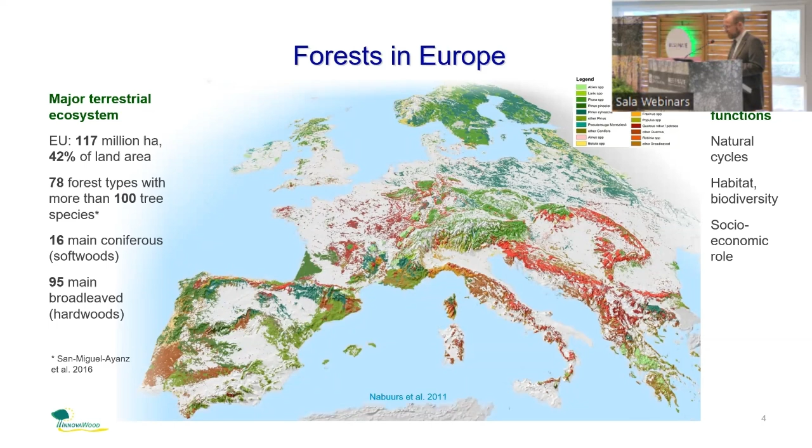These forests are very important for ecosystem functions: the natural cycles, the habitat, the biodiversity, and as we've heard already in many speeches today, also the socioeconomic role. They are the backbone of the so-called forest-based industries, including wood industries, paper industries, furniture, all sorts of uses of timber as a material. And then we can also include non-wood forest products.

But this European forest ecosystem, as a whole, is really affected by climate change, and this will have a major impact. In forestry, we think in long time spans. There will be a shift in the forest tree species matrix, because the increase in temperature and precipitation from climate change will favor different types of local climates, meaning the composition of the forest will change in the long run.

This is already a very well-known graphic from Hanewinkel, showing the shift. If we think in a perspective of forest management up to 100 years, oaks will increase, whereas spruce and pines will decrease. So the cultivation area within Europe will shift more toward broadleaf species. Another very important factor is the increase of disturbances such as droughts, fires, storms, and pests, leading to more risk and uncertainty in forest management, which we have to consider.

As one main recommendation from the Resonate project, which is co-organizing this event today, this means we have to go more into resilient management to mitigate these impacts of climate change. You have to proactively manage the forest and not just leave it alone. You have to adapt and restore forest types — there's a term, 'pre-storation,' a combination of adaptation and restoration. The third recommendation is that you have to develop these forest and forestry value chains more, making value out of wood as part of the objective to improve resilience.

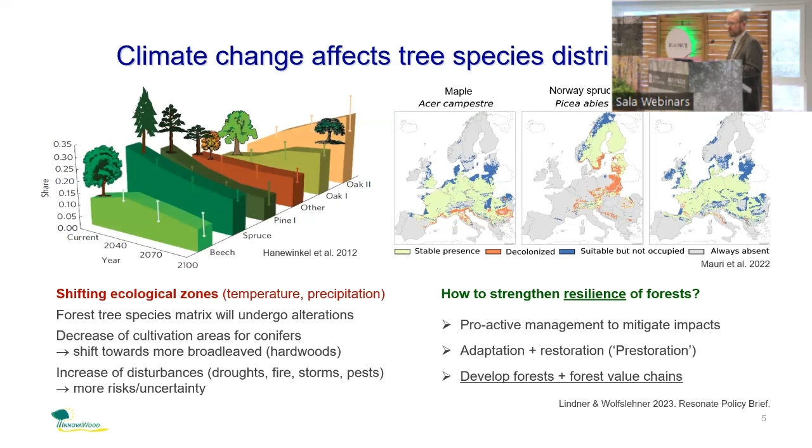But the market reality today is that hardwoods really represent only a very small share so far.

Only 8% of the total solid wood production in Europe is hardwood material, and this goes mainly into the construction sector. 64% are sawnwood and engineered wood products, and another major share goes into wood-based panel products, so furniture.

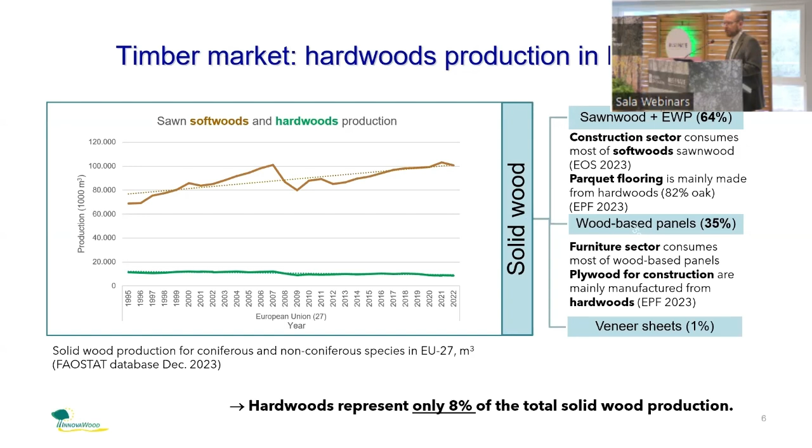The reason is hardwoods and softwoods are not the same raw material in structure. Another important aspect is that the potential to extract value from a tree is much higher in softwoods than in hardwoods. Basically, you can use 80% of a spruce tree, whereas in an oak tree it's only 50% of the trunk and raw material, because the tree has much larger crowns and more branches, so there's just less potential for value extraction.

That's why this hardwood sector is not an economic driving force in the wood sector. If you think about developing the hardwoods field further, you have to consider there's an ecological reason why hardwoods and softwoods are so different. They are very different types of materials, with very different mechanical properties.

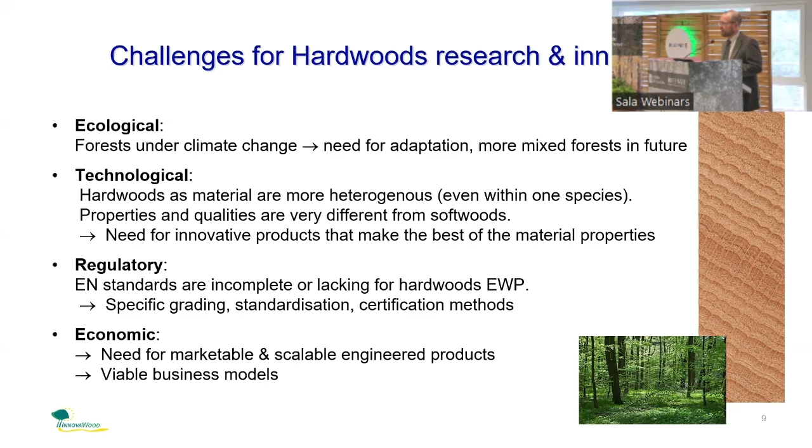That's the first question: where are there really opportunities, or roadmaps where we could go? And then companies have to develop viable business models. So this is the challenge we are all facing, I would say, as a research and innovation community in Europe regarding this hardwoods matter.

So I will show that several companies and people are already working on this. I will pick a few selected examples of hardwood products which are innovating the wood construction field. This is, I think, quite a well-known product already, the BauBuche.

It's a hardwood laminated veneer lumber from Pollmeier in Germany, using the qualities of beech to create a super strong building material, which in a way is similar to or can compete with concrete, but also attains even smaller cross sections than softwoods. So it's outperforming softwood CLT in certain circumstances.

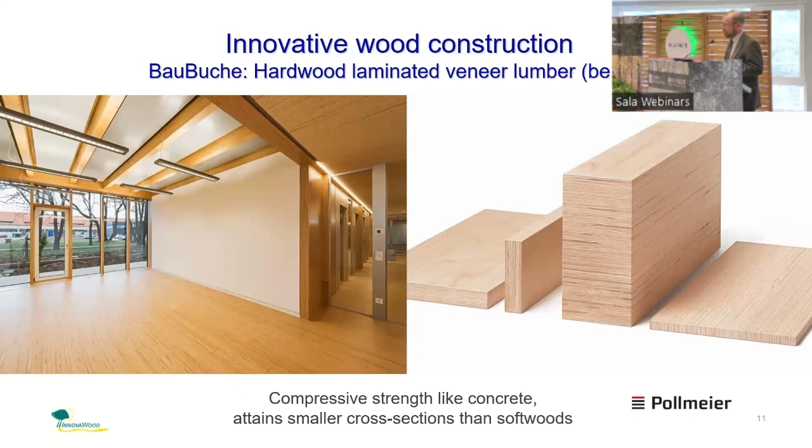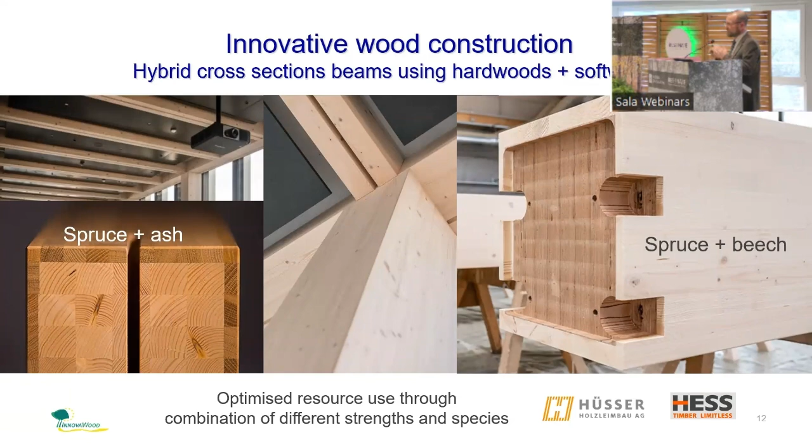Another one is that we can actually combine hardwoods and softwoods. These are two examples of companies working on a hybrid cross-section of beams using hardwoods and softwoods together. This optimizes the resource use, so you need, in a way, less material, and you can combine these different strengths of the different species. So this is one interesting way to go.

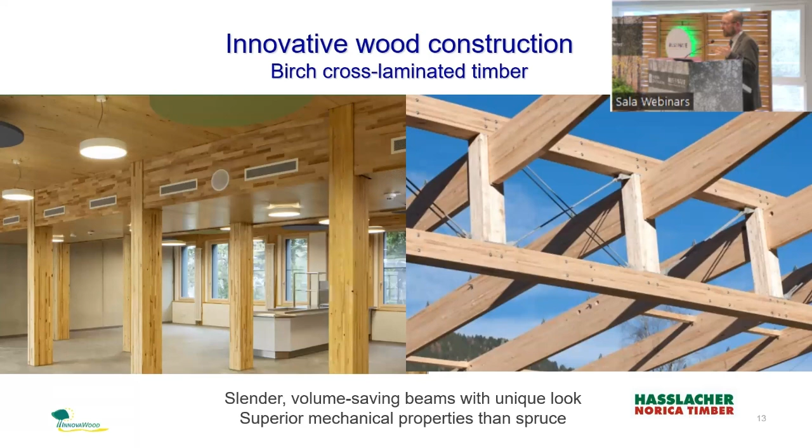As mentioned before, birch is becoming an interesting tree species for the construction sector. Hasslacher is already producing cross-laminated timber as a standardized product, allowing very slender and volume-saving beams with a very unique look. It doesn't look like spruce CLT, and they claim superior mechanical properties compared to spruce, because you can make much longer and more slender beams. So there's an advantage of properties compared to softwoods.

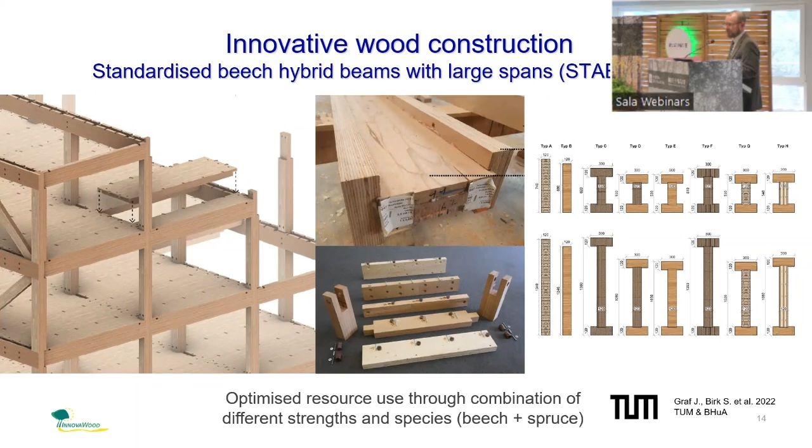Then an example from TU Munich, a German research project, where they look not just at the timber material or engineered wood material, but also at a construction system - how to make use of the difficult properties of beech to create more standardized beam projects useful for larger spans. They worked a lot on different types of combinations and lengths and combinations of different strengths within the components, to create a building system that can be used technologically in the building sector.

Another area goes more into research and innovation, where people are looking into more complex construction systems that mimic organic structures. We all know the tree is the most optimal structure to use resources in a biomass way. It grows naturally because it saves energy and material, and to mimic this in construction processes can be very interesting.

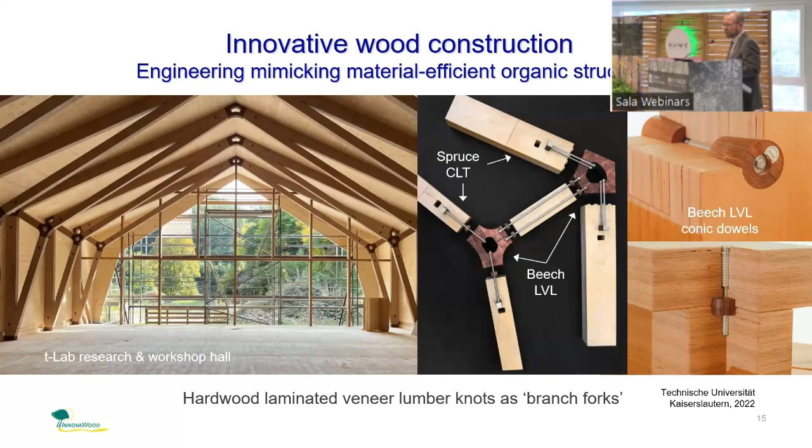This is a project from the University of Kaiserslautern. They use spruce CLT, but connect it with hardwood laminated veneer lumber to create very strong knots which mimic, in a way, a branch of a tree. They also have different ways of connecting it with beech conic dowels - a very interesting direction to use engineering to copy advantages of timber.

And then a last one, which is a more inspiring, quite disruptive approach - something called whole tree architecture. There's a whole area of companies and research centers trying to use this. The idea is not to destroy the timber, the tree, but to use the forces and the shape of the tree as it is, and then use scanners and advanced algorithms and CNC robots to assemble these naturally grown components. This is an example from, I think, London.

It's a design office in London. They created a whole barn where the main beam structure in the middle is created out of different hardwood logs, if you want. But this is not just fantasy - there are actually companies also in the US creating large barns and large structures with this kind of tree, just using the tree as it has grown.

Okay, so more ideas just to inspire you where research in this field could go. And then I'd like to give a bit of an overview of European initiatives.

On the European level, there's this notion of carbon sinks - cities should become carbon sinks. We are all dealing with the climate crisis globally, and it already impacts us on many levels - you just open the news every day, there's a new crisis induced also by climate impacts. That's, I think, one reason why timber has become more evident and visible in recent years, because it can offer part of the solution for climate change mitigation. The question is, can we really talk of a timber revolution, or is it more of an evolution where step by step the wood sector becomes more important? But definitely there is a strong advantage of the wood sector to contribute to the decarbonization of the built environment.

This only can work if we connect forestry with long life wood products and also with the construction sector, the built environment. So we need sustainably managed and resilient forests, and we also have to take into account adaptation to climate change and ensure biodiversity - this has to be a holistic approach to forestry. But the timber used from this land use can go into long life wood products, and we can innovate and improve a lot there. Another aspect is that these long life wood products should become circular - the idea is that we don't just produce a product which is used and then destroyed again, but that it can actually be disassembled, so buildings using these products can be taken apart and constructed again in a different building.

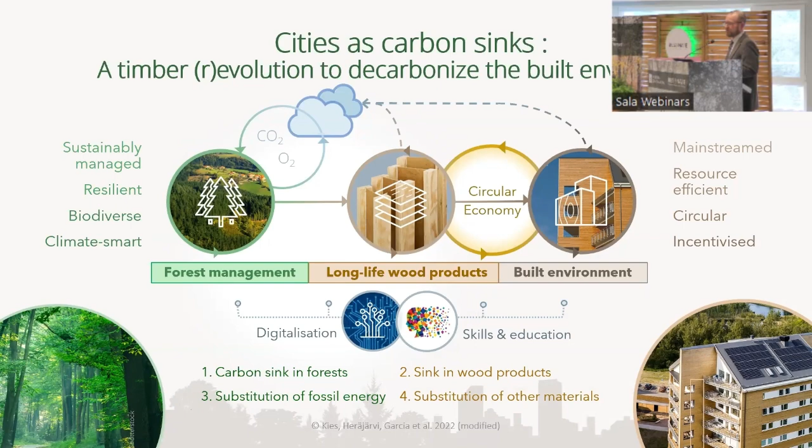So this circular economy will have a very big impact on the long-term carbon sink function. This can only have an impact if these kinds of products become more mainstream, if they can be upscaled, if they can use the material in a much more resource-efficient manner. They have to become circular, and I think the public sector especially has to be a pioneer to incentivize this.

So this is the narrative which is becoming much more visible in Europe. One interesting new approach is this New European Bauhaus, which was launched by the President of the European Commission in 2022. It's the first time a President of a Commission starts talking about wood, and everybody was really surprised to hear that.

We all know that today, building with timber could save up to 40% of carbon emissions compared to concrete. By keeping the carbon inside the wood, one day timber could turn our homes and even entire cities into carbon sinks. This is a very strong message if it comes from the President of the Commission - one of the best ambassadors for us.

The reason is because she was advised in recent years by people from the wood sector and from climate research, notably Professor John Schellnhuber, Director Emeritus of the Potsdam Institute. His slogan has become, in recent years, reforesting the planet and retimbering the cities. Timber construction can become a true silver bullet to fight climate change. So I'm saying this should also be our main narrative.

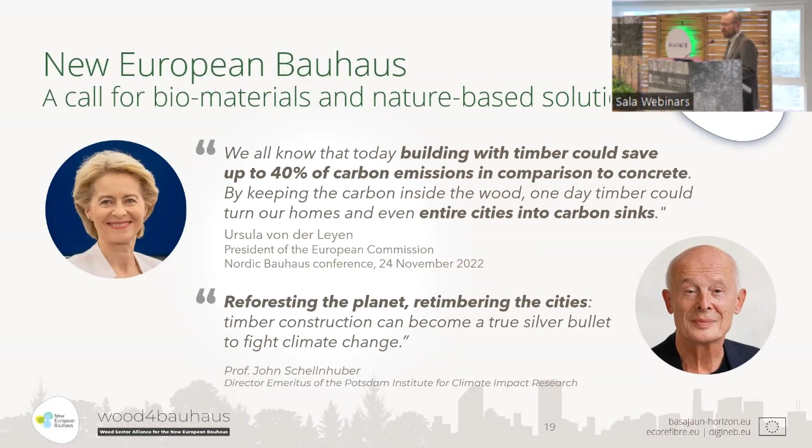If people are listening to us in Europe, we should talk about climate change. We should talk about this possibility that this is a solution to problems the whole society is facing.

So this New European Bauhaus initiative is actually a project of the Commission - a grassroots co-creation movement for the European Green Deal. I won't go into details, but it has triggered a lot of interest, new initiatives, and prize competitions around Europe, and now European projects are funded that are labeled with the New European Bauhaus.

And we from Innovawood are part of one alliance created because of this New European Bauhaus. We call it the Wood for Bauhaus Alliance, which involves all the major umbrella organizations in the woodworking sector - the European Panel Federation, the European Confederation of Woodworking Industries, the European Organization of the Sawmill Industry, and also the European Federation of Building and Woodworkers, representing the trade federations, trade unions, and the woodworkers.

With this alliance, we are quite active, engaging with this Bauhaus movement. We are following what is going on there, writing policy recommendations. And one new outcome is that we have now created a New European Bauhaus Academy Alliance, which will be a platform for skills and training in wood construction.

The idea is to inform other sectors - the construction sector, architects, public planners, the financial sector - about the benefits of bio-based materials. It's a bit larger than wood, but wood has a very prominent role. So how can wood construction become a solution for rural development, urban planning, and urban development? This is the focus of this European platform, which will be launched very soon.

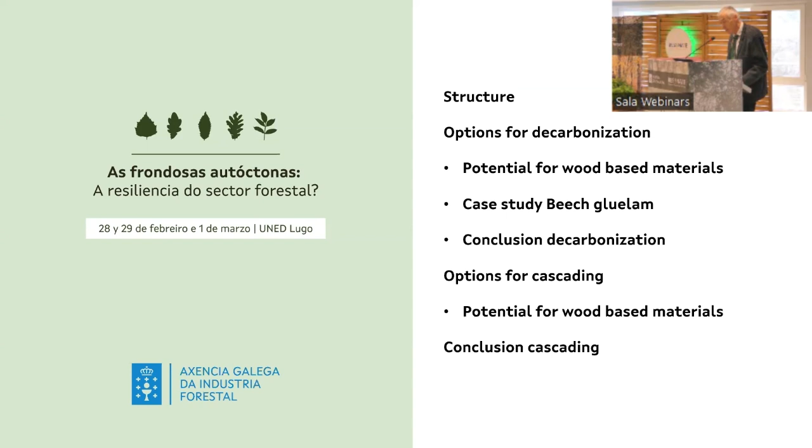And of course, we all know that climate change is reality. We have focused on the big impacts. The catastrophic development has shown even on our ecosystems, especially in Germany, very dry and catastrophic disaster events in Central European forestry in recent years, mainly based on the structure of the forest, but also impacting regional resilience.

And of course, the required conditions are that we have to ban the effects or the causes of the big increase in global temperature, which is clearly related to the use of fossil sources. We have to ban fossil carbon sources by 2050. The next big step is extension and creation of managed carbon sinks. Here, of course, forestry comes into play, and of course also carbon farming.

This could also be related to the wood industry and the protection of natural carbon sinks. Forest needs to be conserved and regarded as important carbon sink ecosystems, along with wetlands and coastal ecosystems. So these are the three main required conditions for decarbonization, and I would say for defossilization, because decarbonization is maybe the main word used.

I think it's a little bit misused, because we will also need carbon from our ecosystems to build future technologies. So to totally ban carbon in our future technologies is maybe not the right way. So I would give priority to the word defossilization.

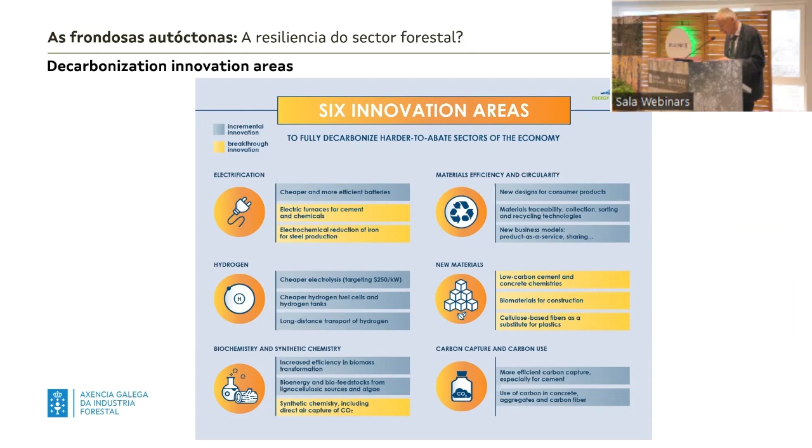So the six areas for innovation where decarbonization or defossilization can take place are shown here. I will not go into the details because I will directly jump to the next slide where we can see technology plays a very important role.

Technology needs to be focused and adapted, and the only hope I have as a technologist is that on one hand, technology can try to give possible solutions. On the other hand, we as the ones using technology also need to adapt. The society needs to be informed that we will not be able to continue as we have done it in the last 100, 200 years. Our future generation needs to be adapted to what is happening now.

This is maybe a fault we have done. We have overused our planet's resources, and now we have to try to adapt our mechanisms to allow at least a decent life for the future generation.

So technology is important. Process developments are closely linked to technology, and of course enablers. This is the human capital, human resources which we are building, and at the end it needs also to be paid and needs to be realistic from the economic point of view.

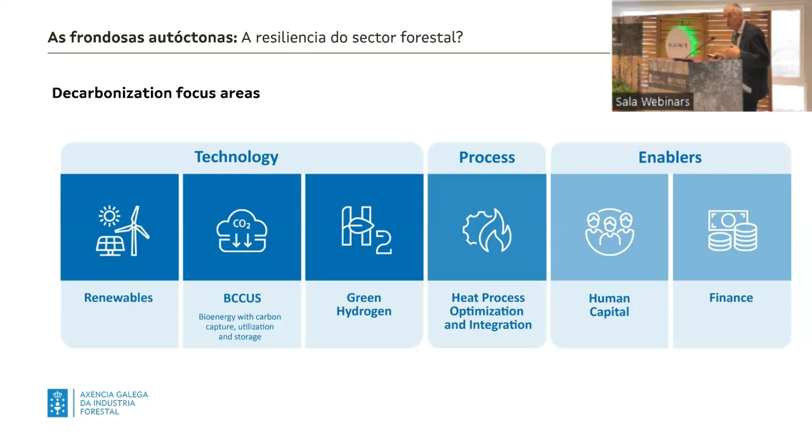I think this is one of the big hurdles we will also face, that industry, and our future followers, will need to pay for what we are now trying to change. This is in the beginning also caused with higher expenses, and this is some of the big challenges we also have to discuss.

Buildings are causing more than already 40% of global change effects. This is clearly shown in different studies from the United Nations Environmental Programme. More than 37% of carbon dioxide emissions are caused by buildings and construction.

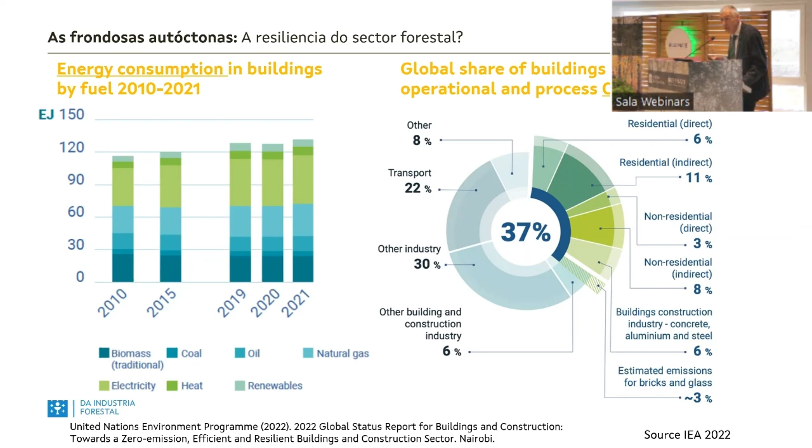That means with the building material, and wood is also a building material, a main building material, we have something in our hands where we at least try to address those big numbers. And here is also my link to the keyword defossilization, decarbonization, and of course it was also shown how this can happen.

On the other hand, we have to think that building construction, the building materials used to build the sites, houses and infrastructure, is less important in the moment because we have improved, and other materials have also improved their technology. It's the building operation which causes much higher percentages in this 37% of global carbon dioxide effects.

I think wood materials, and here also biotechnology and technology, can play a role, because wood is a material which is strong and is also a good insulator. Building operation means the losses of energy, how we operate our buildings—cooling and heating comes into play. Compared to concrete, steel and plastics, wood is an interesting bio-based material which can play a role in mitigating and reducing building operation costs when we use it with good spirit and caution.

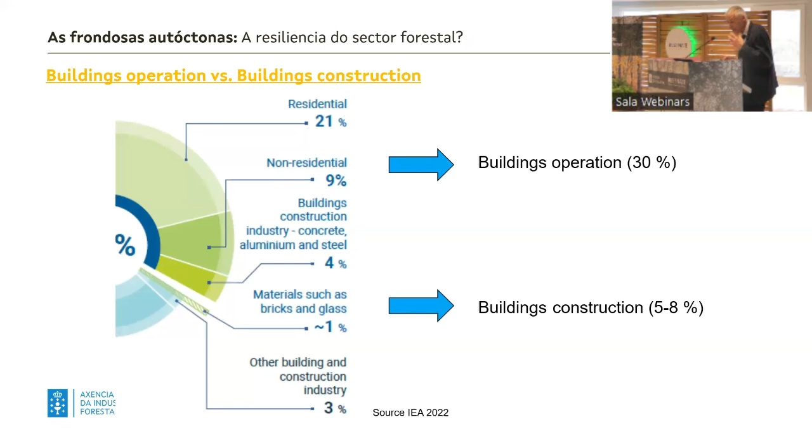This is, I think, the most important argument, which has also triggered the wood industry development over the last 20 years, because for many years wood was not realized as a competitive material. But when ecology and the climate crisis came into play, people realized we have something in our hands which we can use efficiently to mitigate those impacts. So it's up to us as active partners in this wood chain development story to use timber as long as possible.

Of course, we also know there are challenges. Timber is a material which can burn very easily. So when a wood house or a town built out of wood is destroyed, we very soon have not a sink but a source of carbon, the same as in the forest. So this is all rather critical, and we have to take all measures to avoid negative impacts from this development story.

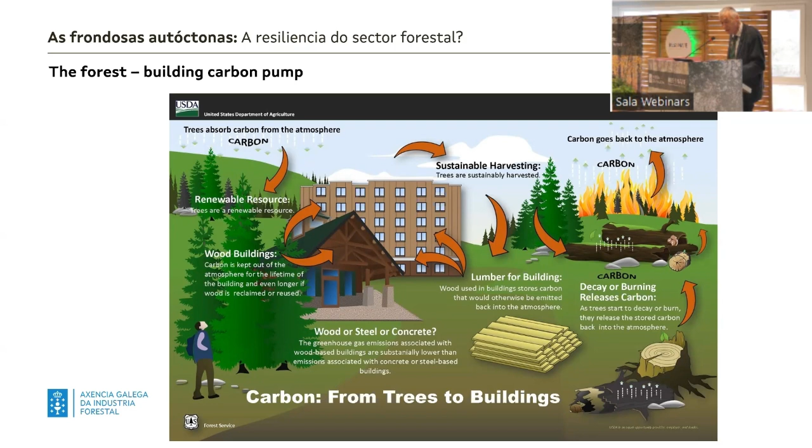We cannot go into the details here, but we can talk about it in the coffee break. This is also what was shown.

When we see that in the upcoming decades the human population will increase more than ever — we will reach 10 billion people soon — then we will need more cities. If we build these cities out of non-fossil materials like wood and bamboo, we can really change the impact that building materials and building operations have on future carbon dioxide emissions.

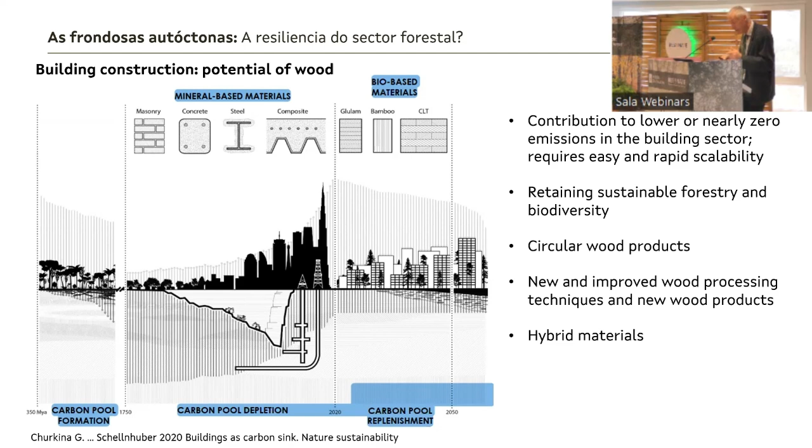This, I think, is one of the important scenarios we will further discuss. To illustrate it: when we build millions or billions of dwellings out of concrete and steel — meaning 90% of future materials are concrete, and we continue as now with only 10% wood impact in building infrastructure — then we will emit 71 gigatons of carbon, and we can store only 0.4 gigatons of carbon.

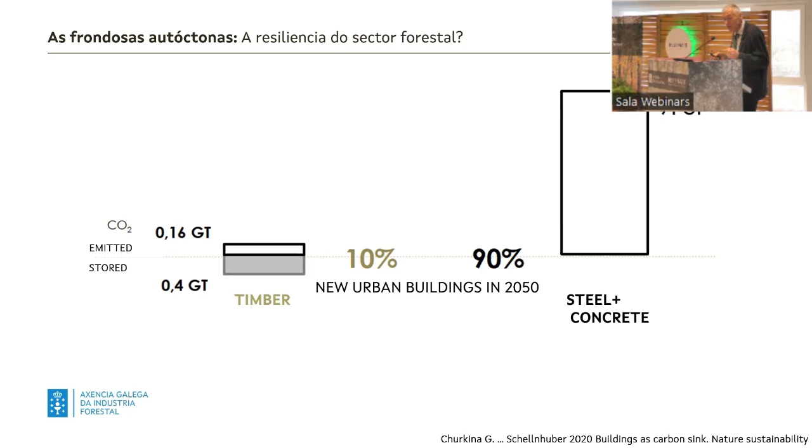When we would be able to change this — using 90% wood and only 10% concrete — that would be a very dramatic change in the building processes.

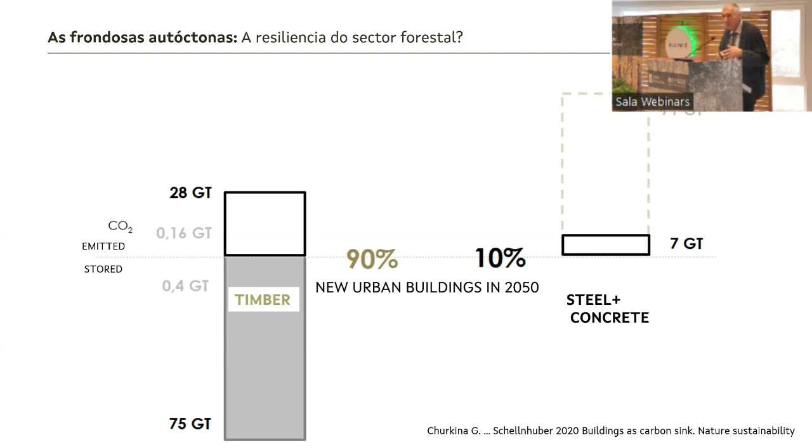Then the stored carbon in timber would raise the storing capacity to 75 gigatons, with only 7 gigatons emitted from concrete and 28 gigatons from the processes in wood construction — because wood construction also needs fossil energies and fossil materials, so we cannot totally eliminate other materials. That's also part of this hybrid technology. But you see, if this were a realistic scenario, the global impact would be dramatically and positively affected. But it's a hypothesis.

When we look at what EFI has presented in numbers for Europe, this looks rather good. Forest area, growing stock, wood production, and net annual increment are all growing, meaning the wood industry seems to be on a good way. But of course climate change affects our forest ecosystem, so I think future figures might look a little different.

In Germany we have just the fourth or fifth national forest inventory for every decade. I guess the figures will not look as optimistic as before. So where will future resources come from? A study from the University of Hamburg has shown that even in Germany, we are using most of our softwoods at a level where sustainability is already reached and maybe surpassed.

Only in hardwood do you see that the non-coniferous potential is still a little bit given. That means we are relying on hardwood technology even in Germany. Let's first talk about the problems we will face when using hardwood.

Hardwoods are diverse, with plenty of species interesting for specific qualities. But when we look at the hardwood properties as industry would like to see them, we have to say it's really a problematic source of material. It's demanding. For me as a technologist, it's a source of potential innovations.

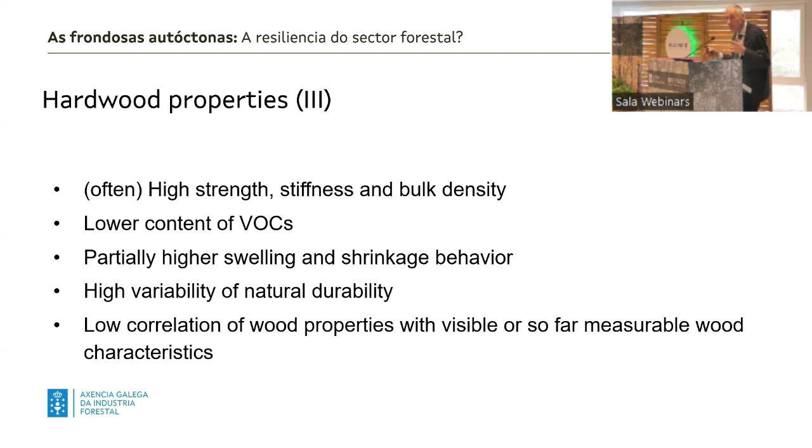Some species are very good in durability, we don't even need preservatives. On the other hand, we have species growing very rapidly, like poplar. Even birch needs additional durability measures to improve it as a long-lasting material. So here we really have to solve a lot of future questions, but we are able to handle it.

I know that Mr. Pollmeier suffered long years, and he could only manage to invest in this idea because he earned his money with trading wood. So this is really a challenge.

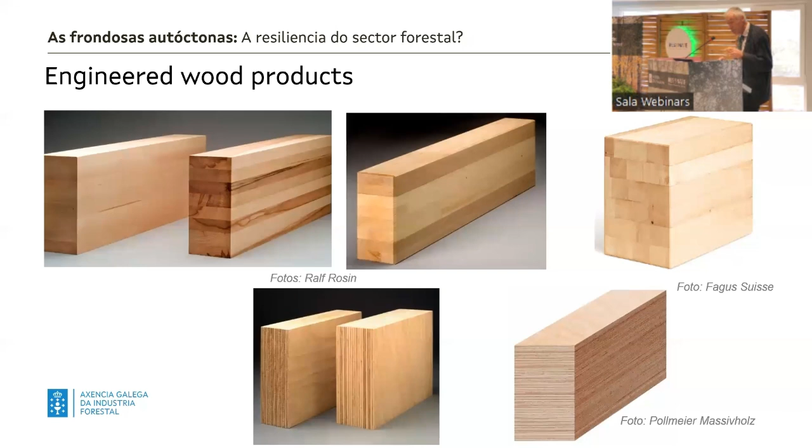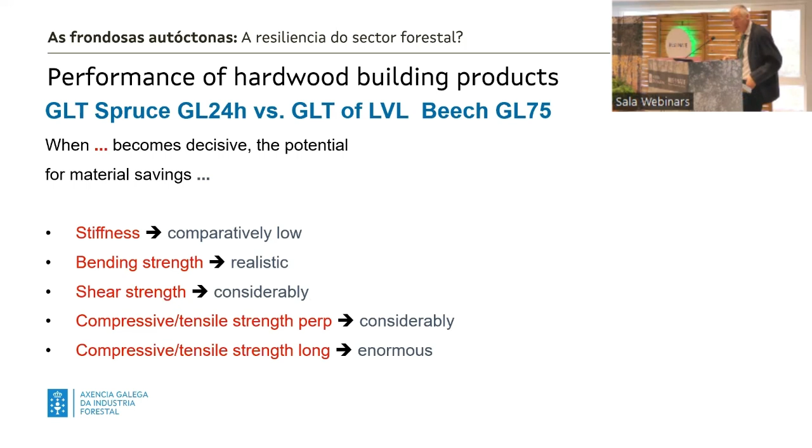But from the properties, very nicely, we can try to change glulam or wood building structures in the technical requirements dramatically. We can be very narrow, very slim, achieve what architects are expecting - very nice and slim constructions. This is really potentially available with products on beechwood, and you see the cross sections becoming narrow, needing less material. This is a big advance.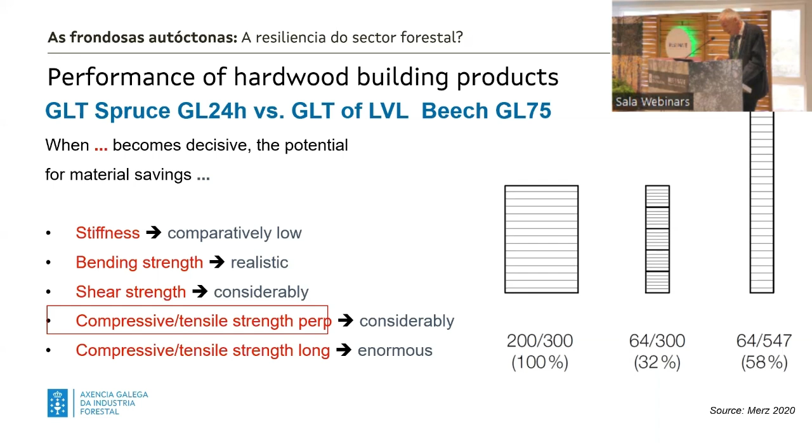But of course, in the fourth chain we have to find solutions for the problems - especially the compressive and tensile strength perpendicular to the grain is considerably higher, shear strength is considerably higher, and strength in the longitudinal direction is also much higher in hardwoods. And of course, products also depend on what has been formed.

Here is a recent publication from colleagues at Boku in Vienna. They show that especially the sawing technology is a very old and not very innovative form of taking rectangular parts out of a round product like a log.

When we go into these stranding operations, this could be something where hardwood processing could especially gain value and interest. I think we are at the beginning of a new technology, hopefully moving away from sawing technology, because we are losing 40% of the material in the first processing step.

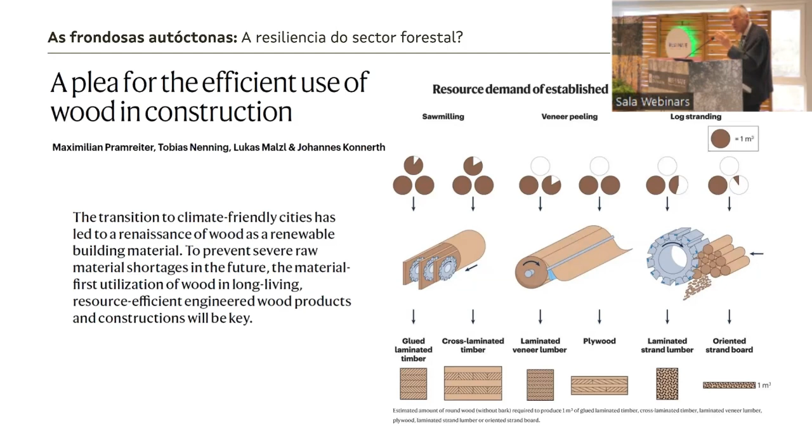We will use it as fiber and as particle, but for the really target product, it is not the main technology. This is why I think the last example was nice, where we have the roundwood. It looks a little bit crazy, but the idea to take the roundwood as the main constructive material, which was done in prehistoric time when no tools were available, is really interesting. We have to learn that it does not look nice. The architects maybe are a little bit frustrated, but that's how it is. From the resource efficiency standpoint, that's a very important step. And resource efficiency is important. We have to couple this.

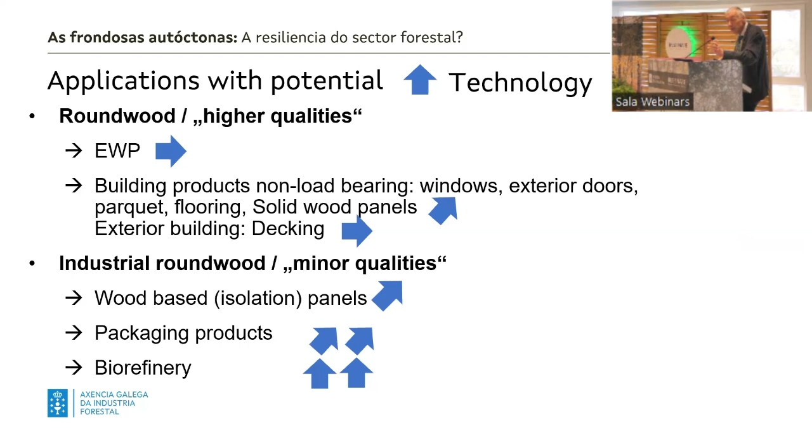The application potential of roundwood qualities is, of course, higher. The engineered wood products are, of course, very good. What are the application potentials in relation to defossilization or decarbonization? I have shown here technology-wise, we will continue with the engineered wood products. Maybe the processing can be achieved. Hardwood is mostly used in interior applications - windows, doors, flooring, especially solid wood products. Here I think there's a future increase possible. Exterior building, decking - because we always have the problem of durability, I think here we can adapt, but we will not have a steep increase. Wood-based insulation panels - here I see a lot of potential for hardwoods, and packaging and biorefinery are future markets certainly, and we will have further future talks to go into the detail.

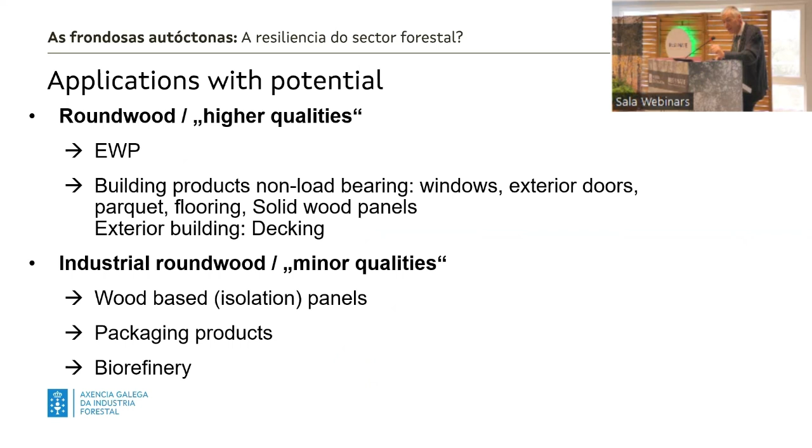The same when we look at decarbonization - I think when we would be able to put more wood into the engineered wood product chain into the buildings, this will certainly have a high impact on defossilization. The other technologies we can continue, but also for the minor qualities - and this is good for hardwoods - wood-based insulation panels, packaging, and also biorefinery. Here I see a lot of potential that decarbonization effects can be created by using future hardwood availabilities. So this is my personal view here, and we can discuss this.

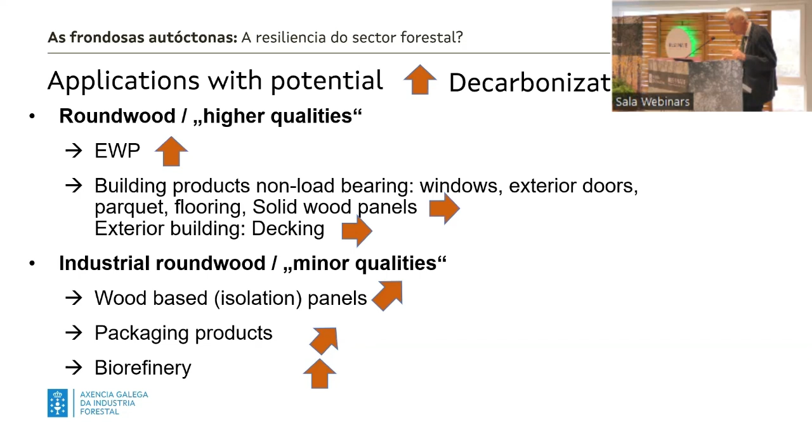The question is also the ecological impact wood production causes, which is high. And of course, what will happen when we are changing to bioeconomy, when we change the glues we are using - in the moment we are using glues from synthetic production. Step by step, we will be able to use tannins and other biomolecules in our products. What is the effect of this? We have made several studies on this for textiles and also for solid wood, and I will only show you the results for the glulam production.

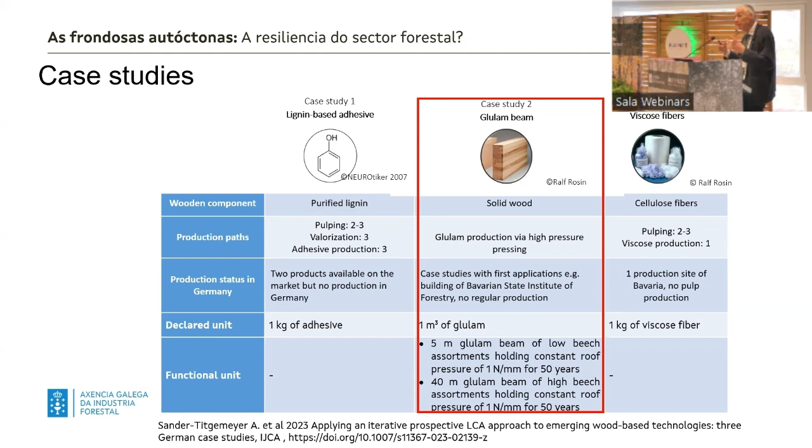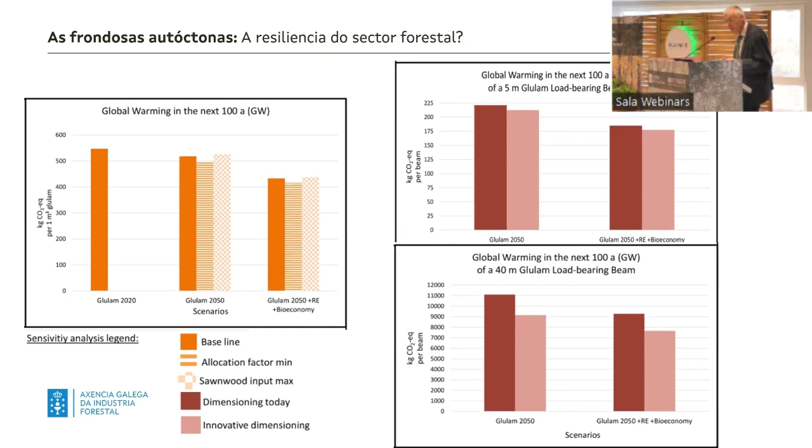When we are really able to go into glulam beam processing, we have made several scenarios - one cubic meter of glulam, but also not only the product but the application in a construction, a 5 meter and a 40 meter beam. And you see the results here - the results are improving. That means in future, with future technologies, using bio-based adhesives, reducing the strength, adapting the technical standards, the normative values - then we can also show that the future possibility to use hardwoods will also have a positive ecological background and ecological effect. So that means there is improvement possible.

And these are my first conclusions. The future scenarios for 2050 predict reduced environmental impacts for hardwood building products, implying an overall improvement and positive option for decarbonization. The greatest reduction is by the rapid growth of the renewable energy share in the electricity mix, coupled with the amendment of scenarios allowing for smaller crosscuts of hardwood glulam.

So the possible option for more use of renewable energies is also an option for other technologies - for steel, for concrete in the same way. So the others will cope too. But this is good for the environment - it doesn't matter if it's from concrete or from the wood industry. So in general, we could expect some positive values here.

This also affects the third part - that means the substitution potentials, which we are using in the discussion to show up the benefits, will in future decrease because the others will also gain profit from a decarbonization strategy in the concrete and also steel industry. And the last point: the necessary technical adaptation of the process lines, as well as the building codes, needs to be realized in due time in order to allow a hardwood-based decarbonization strategy.

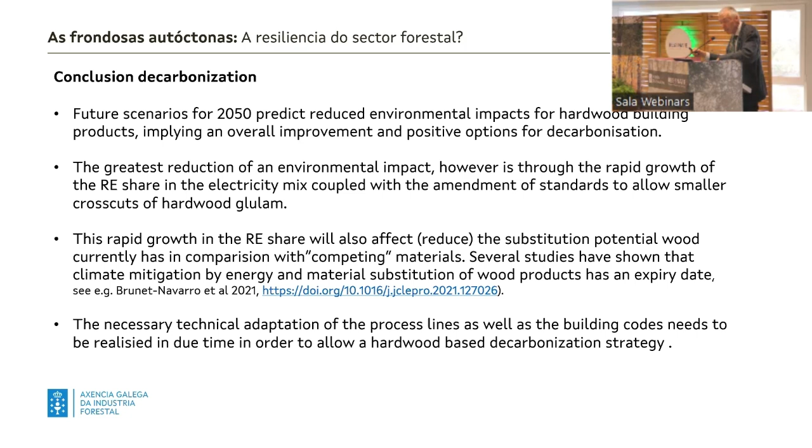That means we don't have to lose too much time. And now the next part is, of course, the cascading.

I will not go into the details, but when you read all the strategic papers on the bioeconomy, cascading and circularity - and cascading is a part of circularity - are one of the main pillars of the future bioeconomic strategy, because we will not have sufficient bio-based materials, not only from forestry but also from agricultural and aqua technologies. There is not more available than the world can produce.

And here, of course, we have to again reduce it. Therefore, circularity - use one material as often as possible - is the main idea. And of course, this is shown in a much nicer way by Francisco.

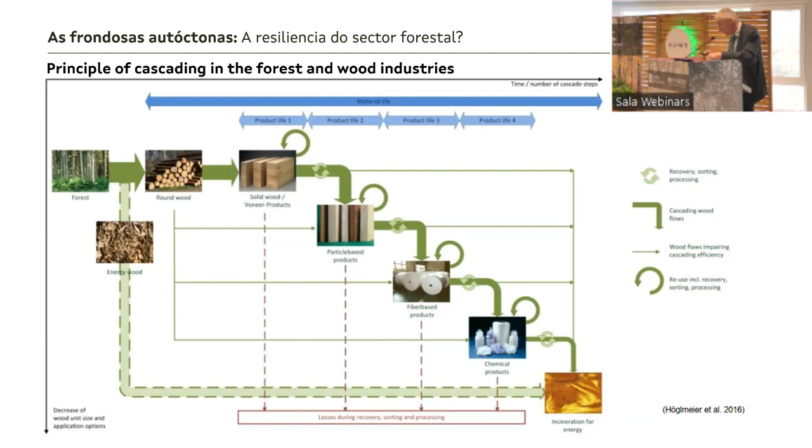So this was the first paper we realized in 2016 on the principle of cascading in the forest industries. All has been said on this, and the question is, what are the barriers? What are the expectations? On this slide I have only written some keywords, and I will not have time to go into the details.

What is important is that we have an increased resource efficiency. What I've shown you in this diagram, how to process logs to timber, is important - here we are losing a lot of material - and then of course also the scarcity of raw materials. We will have plantation forests, and here we can expect a higher production rate, a higher yield compared to natural forests, but this needs to be adapted in the future very soon.

The value creation potential is high. With technology we can find very, very good solutions. All the studies we have done in my institute have shown that especially selected, very critical environmental effects are positive when we go into this cascading industry - not all, because wood is a bio-based material - and I think the other materials will get even more profit from cascading.

We have a product which starts in the production process with very good and high environmental value, because we don't need energy to produce wood. We only need energy to produce a forest, to manage it, and to produce the materials later on. But the pre-effects are very high, so we have to see how intensively we invest energy in order to make cascade steps possible. But generally, we have to go into this way.

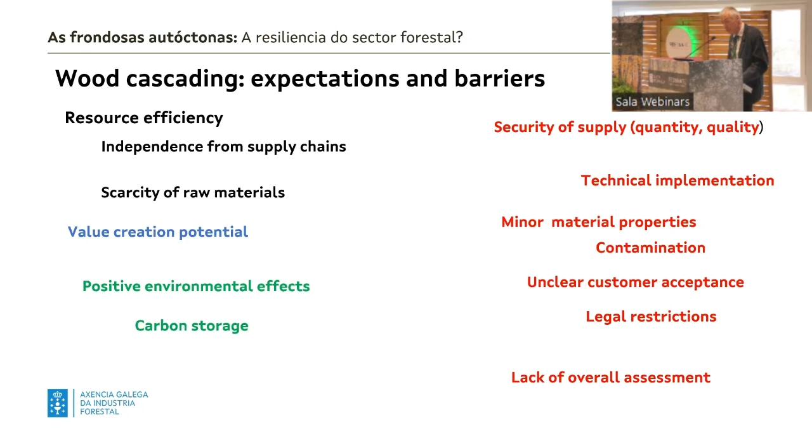And there's also an overall lack of assessment. That means we have to use research to cope with these questions in the future. But there's no time to go into the real details - it is possible, of course.

You see here what we have realized in different EU projects. But we have also seen that the yield from the incoming waste material or used material to the final product, which we can take into the next cascade step, is of course reduced. We started with 20% yield, which is rather low, because to clean it, to deal with nails and screws and get rid of those, is really demanding - but generally it is possible.

Yeah, but we also need glue, we need to put them together - that is also a step that reduces the volume of the products. But generally, the idea is rather good.

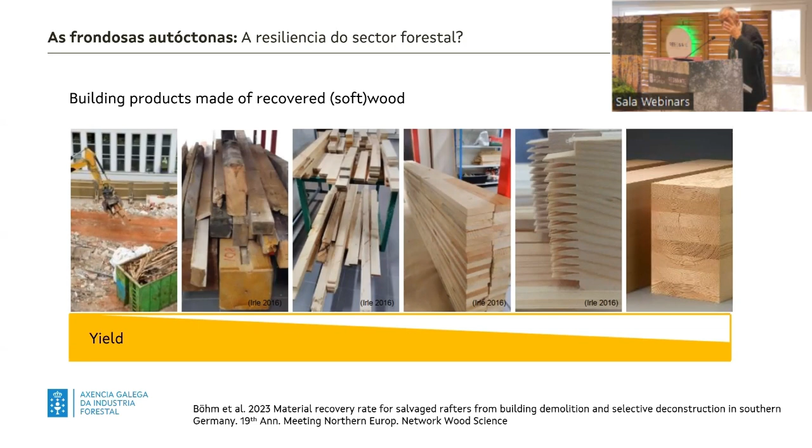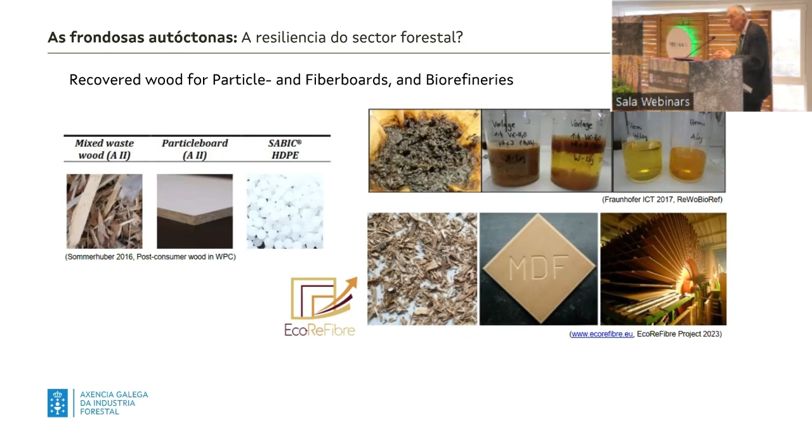I think in the new fields of particle and fiberboards - and you know there are research projects running, the EcoReFibre project goes in this direction - and also in the biorefinery there's of course a lot of potential, because then the quality of the input material, at least the volume, is not of primary importance. Here we go into the mass, and hopefully the nice biochemicals are still conserved over the lifetime. This needs to be solved, but I think there's a lot of potential here for ongoing research.

And then this is an ongoing project we have done. We have a running project at the moment looking at when we are using 2x4 framing elements, and this is what we have done.

We have taken an existing 2x4 framing element a German wood house producer is producing, and we have gone into the process of taking all the elements out. Here, of course, we are coming to a huge variety of different materials. You see a little bit of boards, a huge amount of insulation materials, some massive woods, but also a lot of materials used to put things together - nails, screws, and other connective materials, and of course also a lot of waste.

That means our constructions at the moment are not done for recycling. That means we have to also consider adaptations in the building process. In order to make this possible, and to show such an easy picture to the people, we have to adapt the processes. We need different ways of connecting, so that we can dissolve the products more easily.

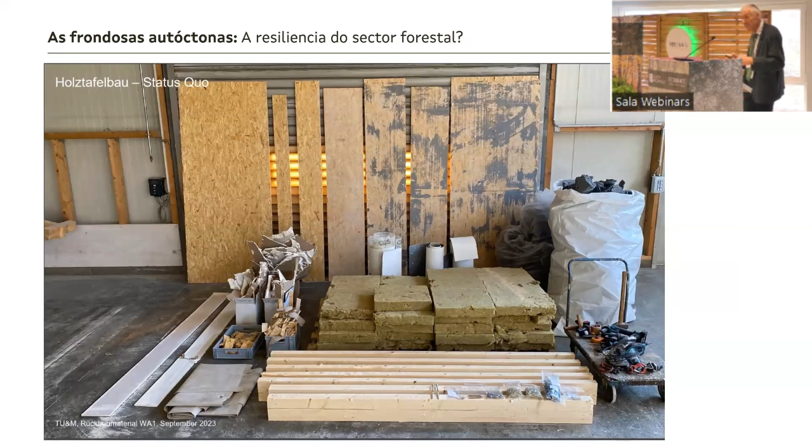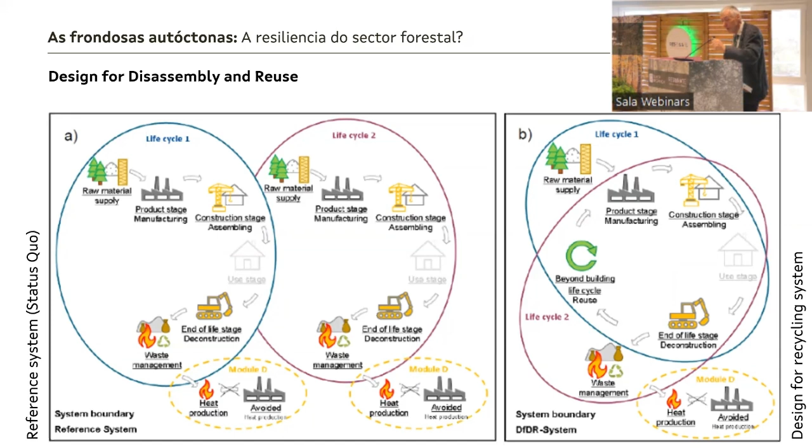Because when everything is glued, it's very difficult. When it is screwed, it's a little bit better, but there are options for improving even existing technologies for future use in a cascading chain. This is important, yeah. And you see also these disassembly and reuse options. We can make some nice investigations on this.

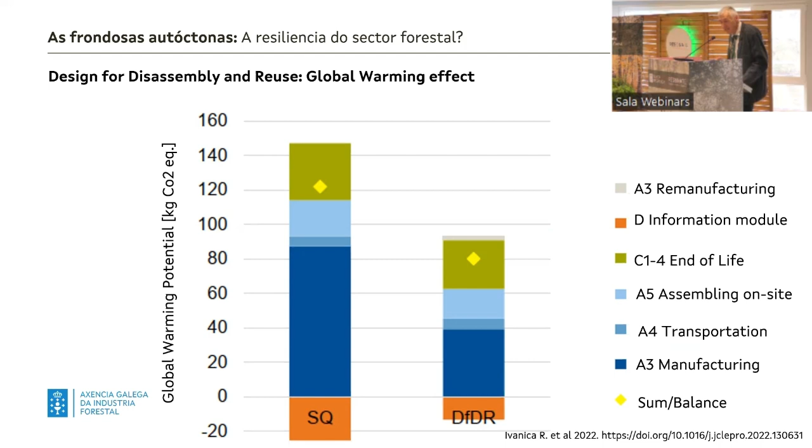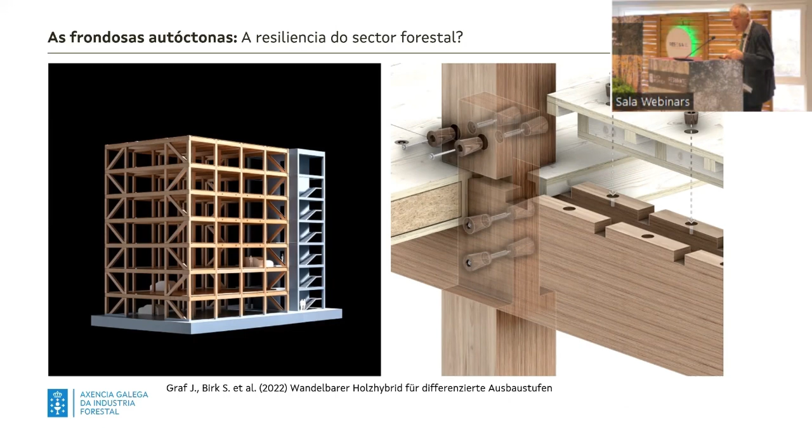This has also been shown by Uwe. Hardwoods, of course, are much better for improving disassembly, because they have better qualities, as I've shown. Here, those connectors can certainly be used in 20 years - we can take the elements out and do not have to destroy all the materials. So hardwood has really positive and future properties, which I think are interesting, and we have to go this way. So, I will close with these last 3 points.

Today's recovery and recycling rate in the wood building industry is rather poor - we are calculating about 10%. On the other hand, we know that we are using 100% of incoming material, but our industry produces 200% of materials, because we are also using a couple of... I'm closing. We are using a couple of materials, even in our existing cycles, plenty of times.

So we are rather good in the cascading issue at the moment, because all our materials produced in the sawmill process are used as fiber materials, or at least, at the end, as energy material. I think we have a good recovery rate, but the recycling rate is low compared to steel, compared to other competing materials.

In the current ongoing case studies, positive values for wood in circularity are shown, and all future strategies on wood with potentials in the bioeconomy rely on circularity effects in order to match the demand for future-based materials with the planetary boundaries. Because this is clear, the planetary boundaries are given.

Biodiversity will have much higher importance in future forest management. That means we cannot take all the wood out or go on as we have done. So the European direction is going towards 30% of ecosystems not being used anymore, then we have less material available.